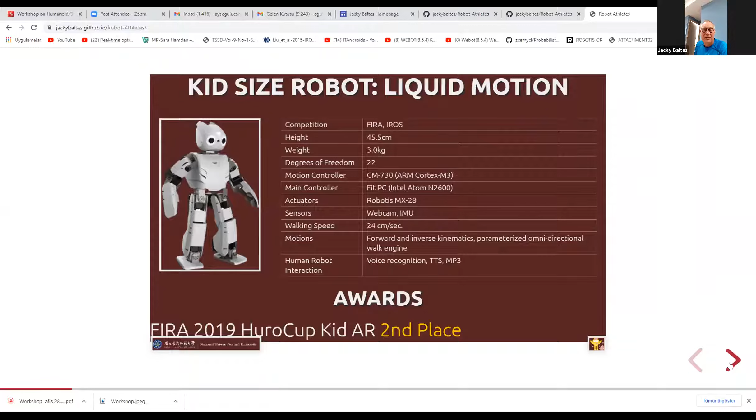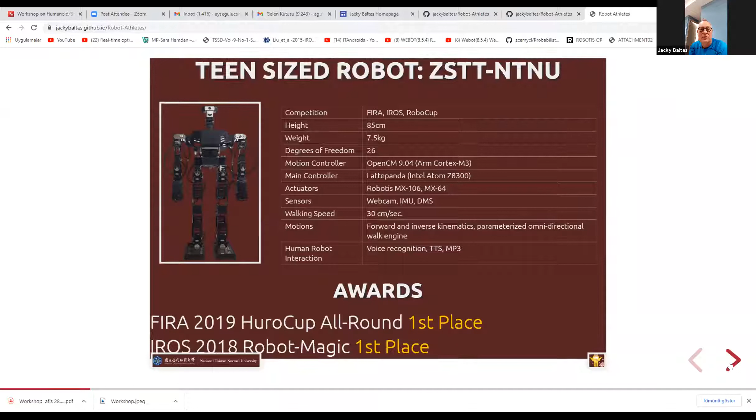Our larger humanoid robot, the 85 centimeter tall Robinion, is heavier and has more degrees of freedom, 26 degrees of freedom. It has articulated grippers, so we have fingers that we can use. With that, it participated in the HuroCup competition and also in the Magic Show.

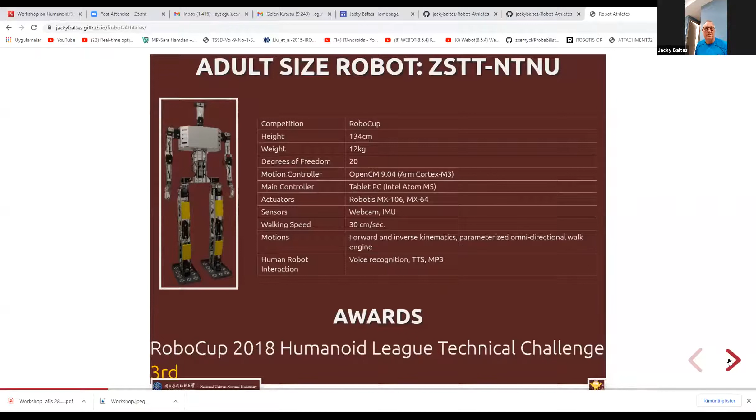We have a 1.3 meter tall humanoid robot that we built specifically for RoboCup, the adult size category. We did pretty well there, winning 3rd place as well.

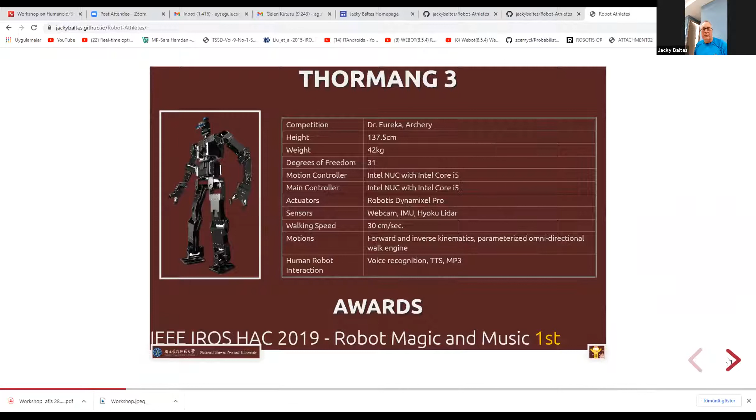Our largest and heaviest robot is the Thormang, which is also built by a Korean company, Robotis. It's 42 kilograms and has 31 degrees of freedom, with more powerful processing and more powerful sensing, in particular including laser scanners. That robot also was successful at the Robot Magic competition.

So for me, robustness and versatility are important aspects of intelligence, maybe the fundamental aspects of intelligence. But humans are actually pretty bad at solving problems optimally. If you consider playing chess, which was one of the standard problems for AI, it took until 1997 until we developed a computer program to beat the human world champion in chess.

In that specific domain, that was possible. What to me was even more interesting was that any one of my students in 1990 could have written a chess playing program that can beat 80% of the people in the world playing chess. Not because my students are supremely smart, but just because most people are very bad at playing chess. It's not one of the things that our human intelligence allows us to do very efficiently.

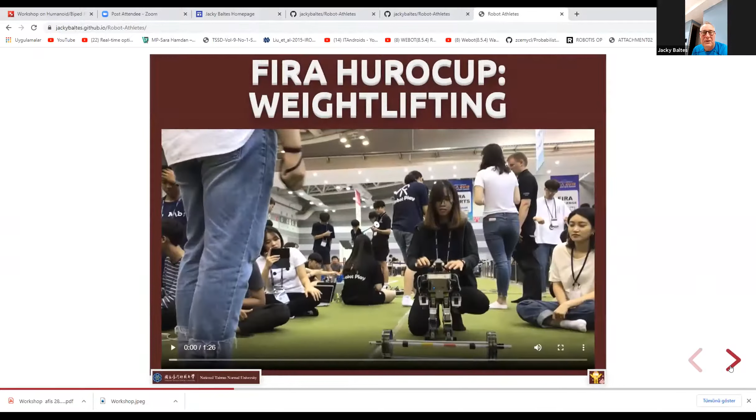Can you go to the next slide then, please? Okay, yeah, we did that one. And next slide, please. Here? Okay, now if you click on the video, at least we can see the video.

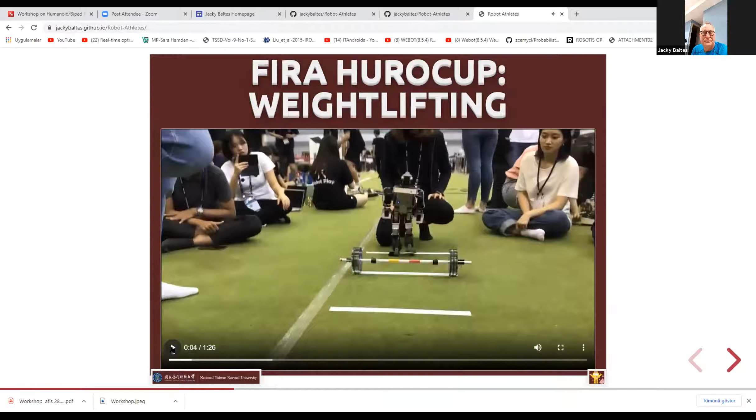So the weight... can I continue? No, continue with the video, but mute the sound. You turn the sound off. Yes, we turned it. Yeah, okay, good. Then we can see the robot.

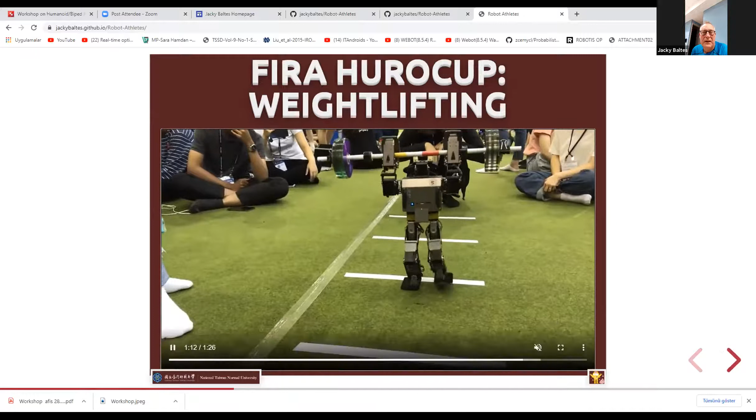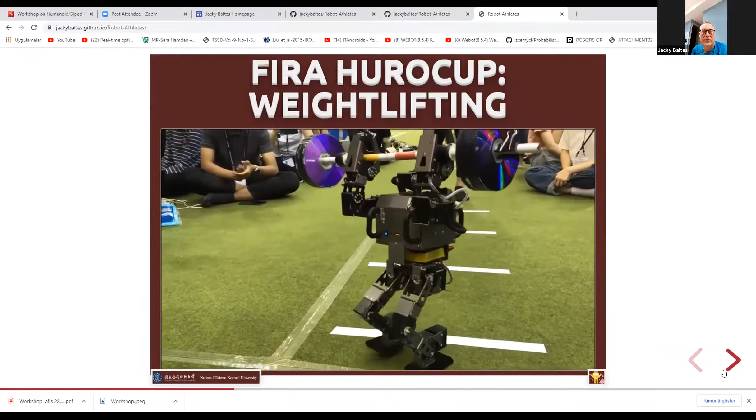So for the weightlifting, it's basically a balancing problem. The robot has to walk up to the weightlifting bar, then move ahead 50 centimeters with the weight low. Now the center of mass of the robot is very low. Now it needs to lift up the weight above its head, which requires proper synchronization between the arms, the legs and the torso. Then it has to walk another 50 centimeters. Now the center of mass is much higher, so it's more difficult for the robot to do that and still maintain the navigation ability, like it still needs to be able to walk at least sort of straight.

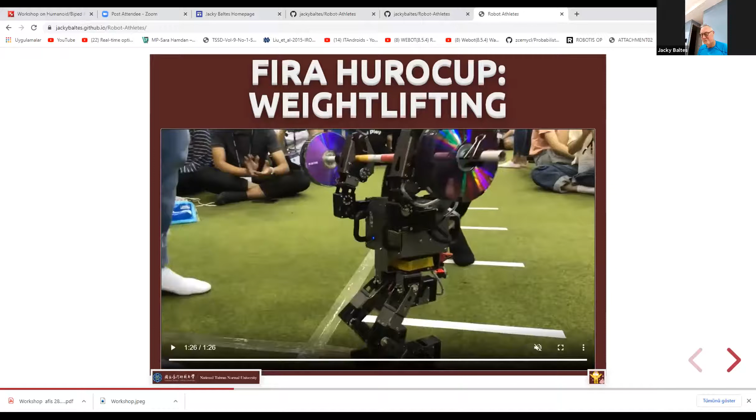So this is one of the events that we have in HuroCup. We can go to the next slide. Next slide, yes, please.

So then we also have a sprint competition. If we go to the next slide, and if you start the video and then mute the sound. There is no video. Next slide. Next slide. Yeah, no, and then start the video and mute the sound.

So in the sprint, the robots have to walk 3 meters forward and 3 meters backwards. So this is a pure burst of speed kind of event. One of the nice things about using sports for AI research benchmark problems is that we can easily see the progress.

So in 2012, the world record in this event was 1 minute and 12 seconds. And in 2018, a team from Indonesia did it in 23 seconds. So you can see how much the robots improve every year, even though we make the challenges more difficult.

And now you can turn on the sound from the video, please, because it's actually quite exciting now.

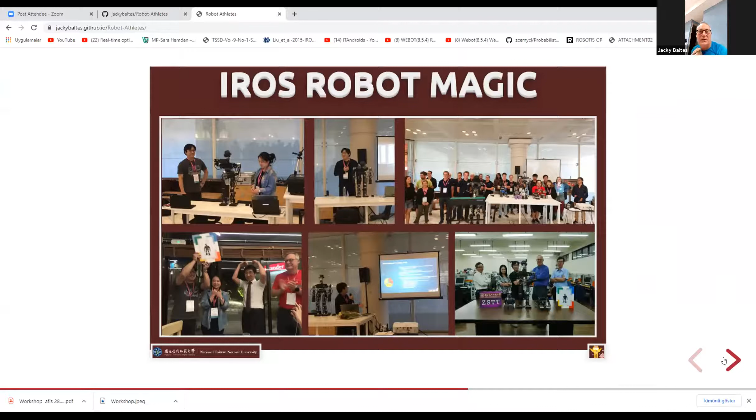And if you play the video, please. I think play the sound, because the robot will give the instructions. I'll turn the volume up.

I think I know where it is.

Cross your arms in front of you now. So the robot is trying to guess in which arm the human put the coin.

And that has a lot of psychology included there as well. It turns out that most people, if you ask them to cross their arms, they will put the coin in the bottom.

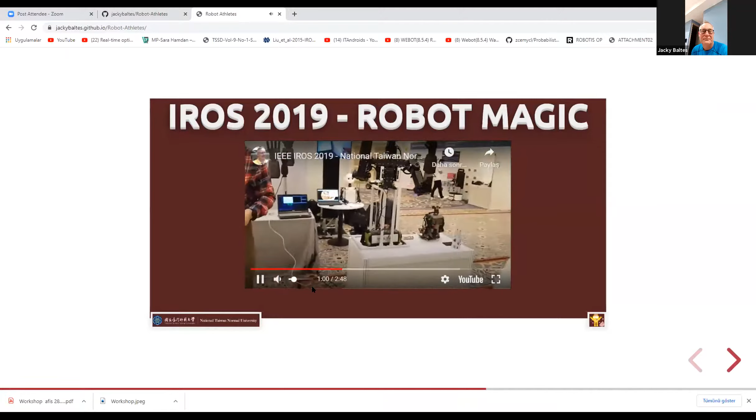And this one, the robot actually guessed correctly. Later, we work out how to detect which arm is on top. It's easy to detect the arms, but it's hard to detect which arm is on top of which other arm.

If we go to the next slide, please. So this is a common magic trick behind hide the coin behind the back, and then I guess when you bring out your arms where the coin is.

And the next magic trick is a nail trick. So there we included some comedy, so I hope that you can enjoy the audio.

The student tells the audience that they've not been successful in their research, so they always place the bag with the nail in the middle of the 3 bags. And they say that in front of me because I do not speak Chinese.

So the funny thing is that they can talk all this to the audience without me actually realizing what's going on. So the audience thinks that my students are using very sophisticated AI technology in order to detect the bag. But in reality, the students are fooling me every time.

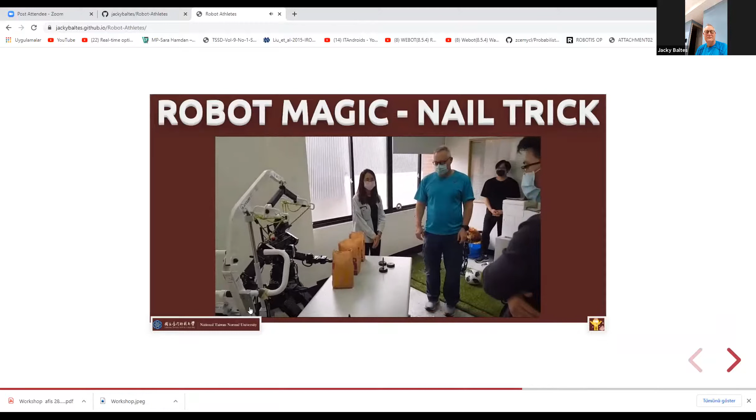Welcome everyone, I am Thorming. Today I am going to show you a magic trick that I have learned recently. As you can see, there are 3 paper bags in front of me.

Later, I will put this wooden base with a sharp nail into one of the paper bags, and then swap around the position of the bags. To make sure we won't find out the bag is empty by feeling the weight.

So I prepared 2 wooden bases without nails. Student, please help me put these 2 wooden bases into 2 paper bags and close it.

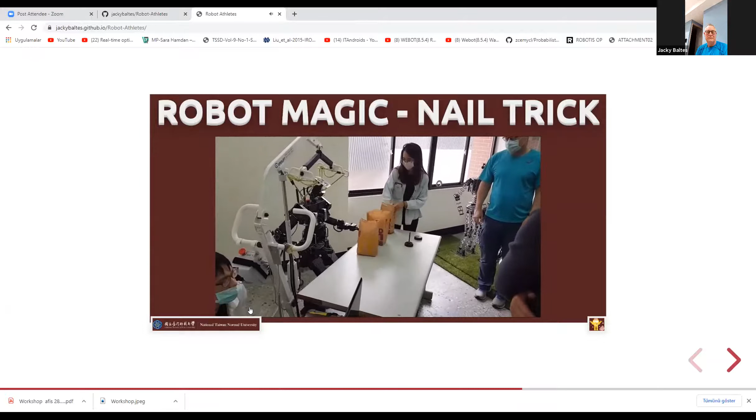So our research goal here is detection, manipulation of soft, deformable objects, because the paper bag is not solid, so you cannot just squeeze it.

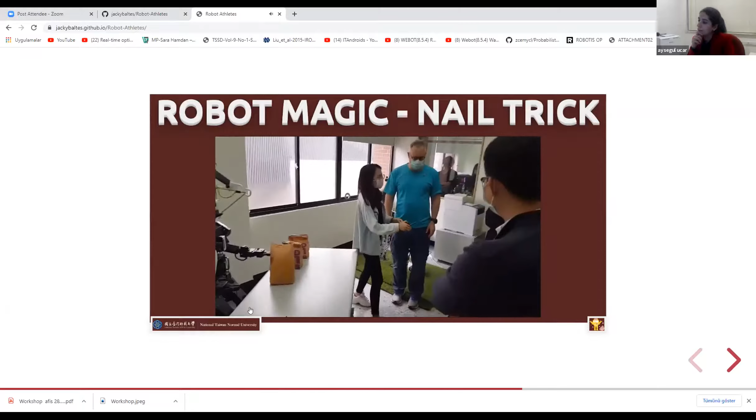Student, please ask an audience member to examine the nail and make sure it is real. Now you can check.

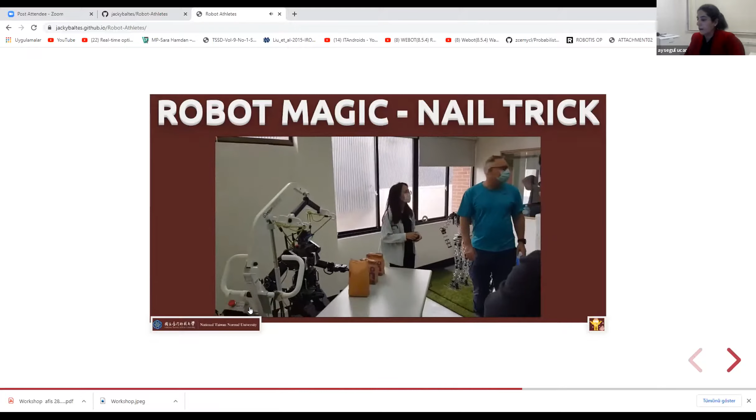So, audience volunteer, can you confirm to the rest of the audience that the nail is indeed real? Okay, thank you.

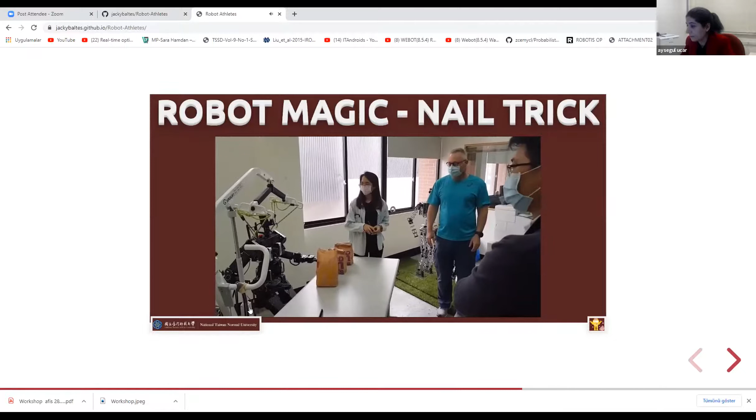Student, please place the nail inside the last bag and close it. And everyone, please pay attention and remember which bag contains the nail.

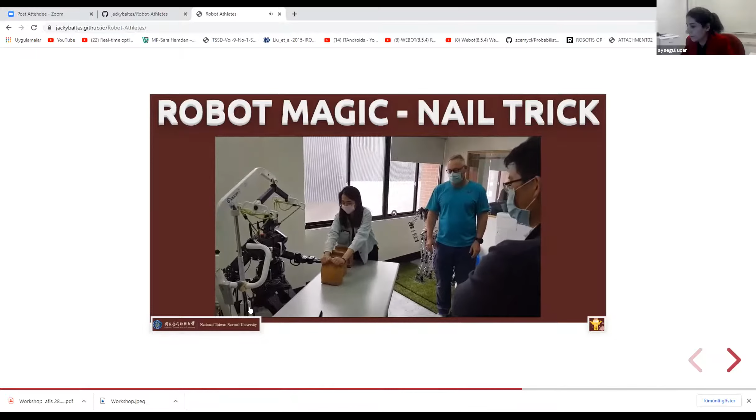Now, I need another volunteer. Any volunteer? Thank you for volunteering. Now, do you remember which bag contains the nail?

So now we're going to shuffle them, but the robot, because it has very fine vision, it can detect where the nail is, basically.

You mean this one, right?

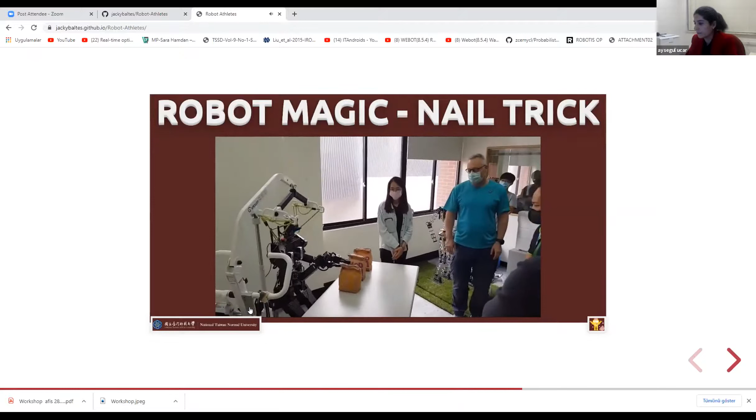To make sure that I won't be able to know which bag contains the nail, the student will start swapping the bags around. When I say start, the student will begin, and volunteer, you can shout out stop anytime you want. So you just need to say stop. Let's start.

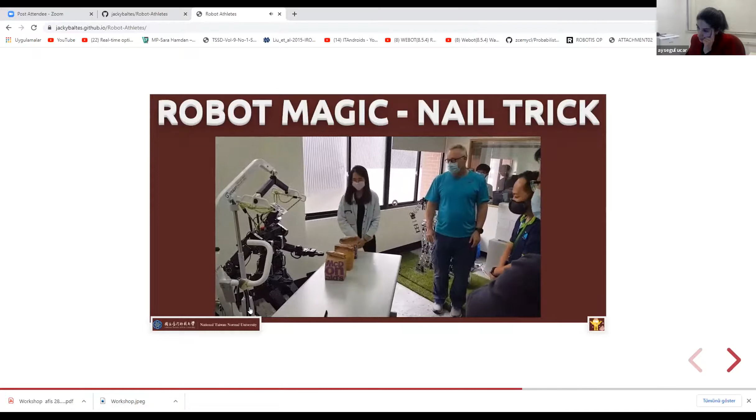Stop. Okay, now I need some time to feel where the nail is.

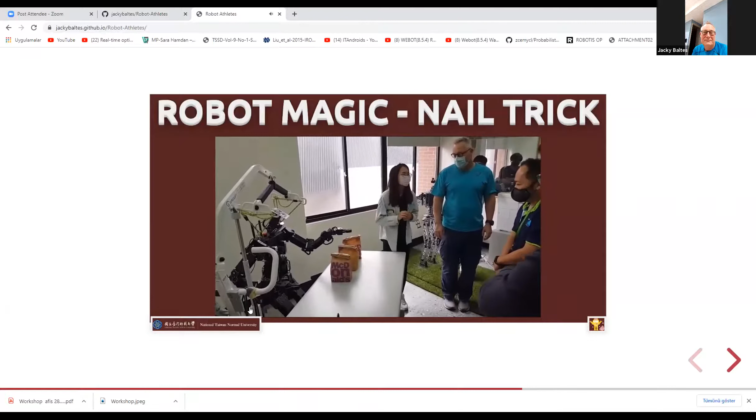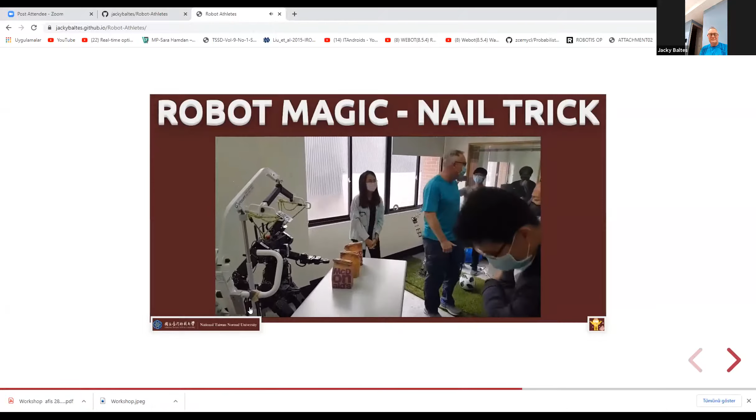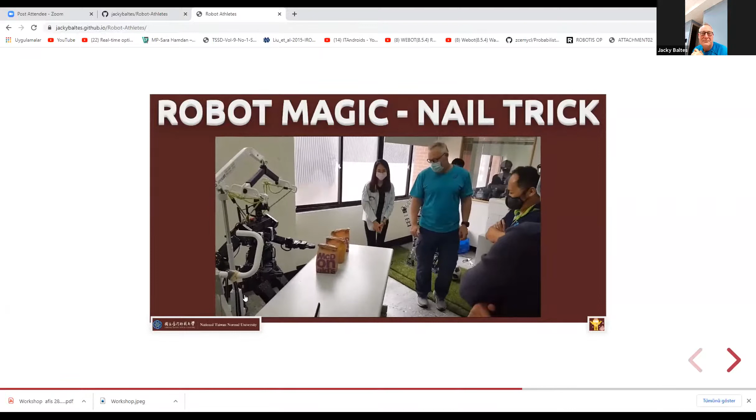Supervisor of your lab, do you believe in my talent and your students' ability? Not so much my students' ability, but their hope to graduate, I think. Oh, I am happy to hear that.

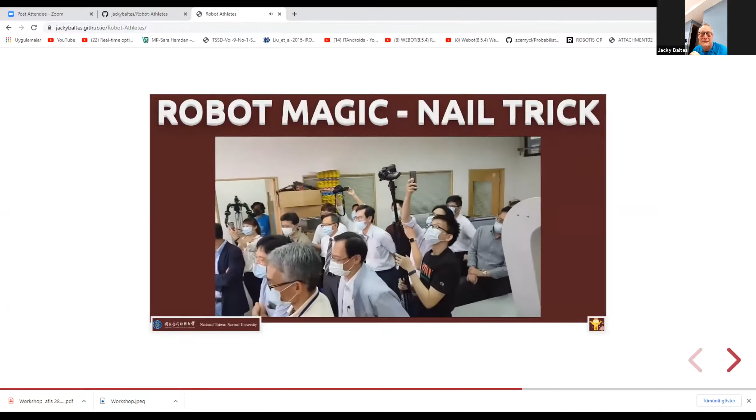Since you trust us so much, we can raise the stakes. How about we use your hand to press down on the paper bags? I'm not so sure about that. It was supposed to be Green's hand, not my hand.

Please give me your hand, Jacky. Okay.

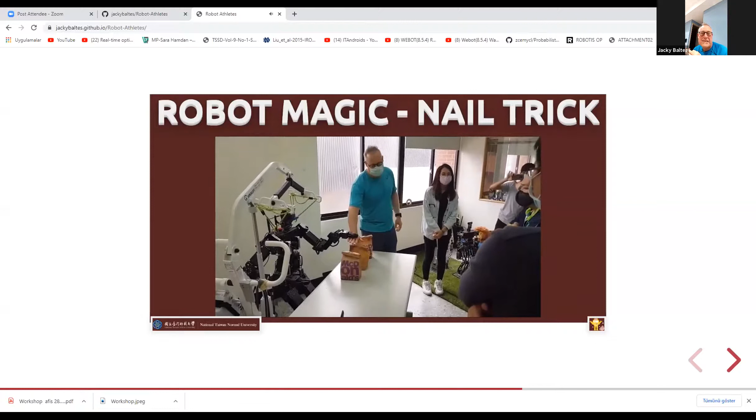Volunteer, choose a bag you think there's no nail inside. Left, right, or middle? Choose wisely. We wouldn't want our dear professor to get hurt, right? Left. Okay, left.

Okay. You sure about this? Oh!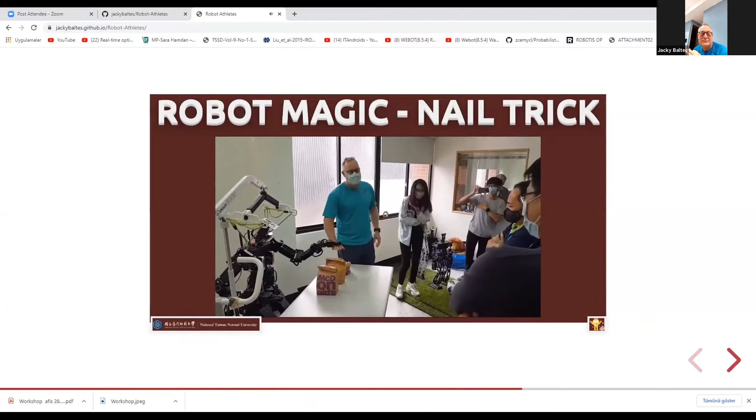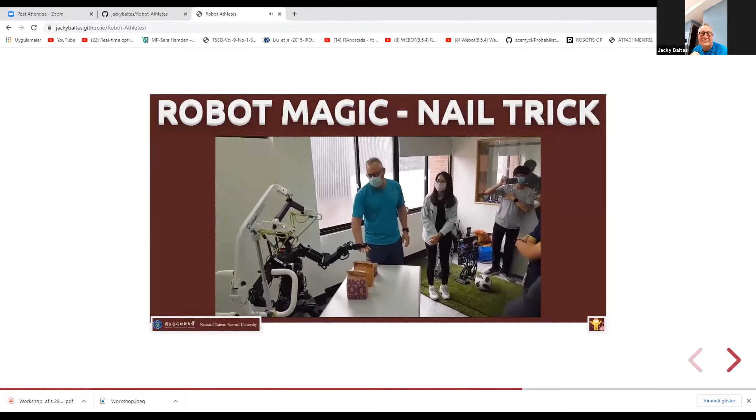Okay, Jacky, don't be nervous, don't you trust me? I am the only hope of graduation for your students. True, they won't disappoint you, trust me. Okay.

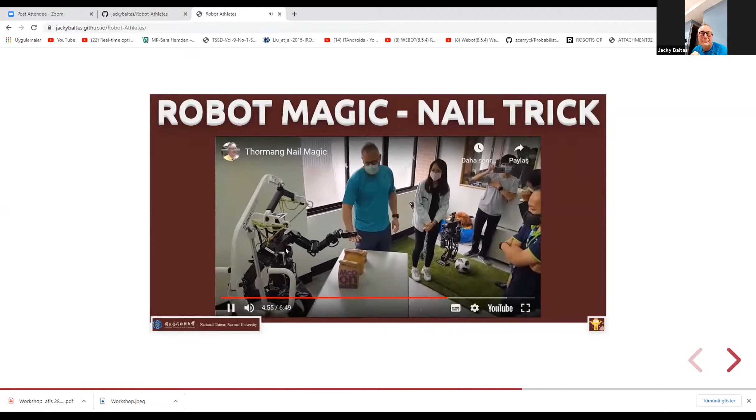Hey volunteer, what's your next choice? Left or right? Right. Okay, right. Okay.

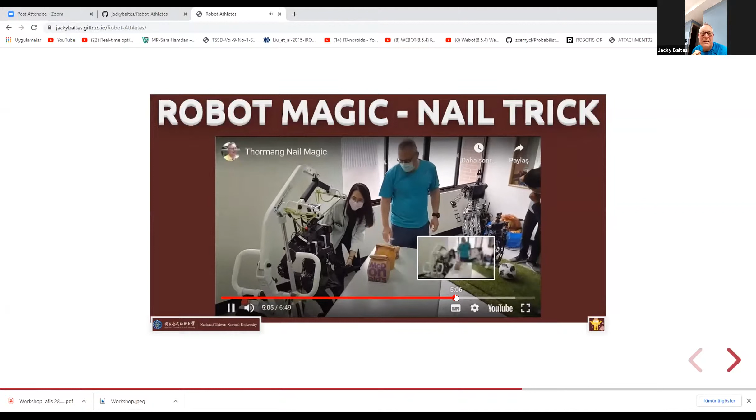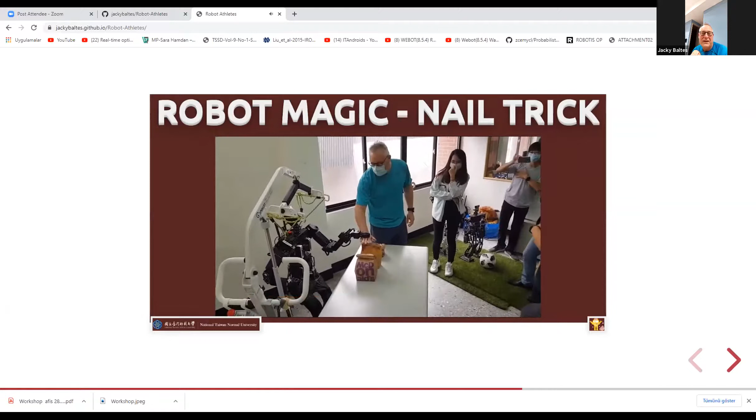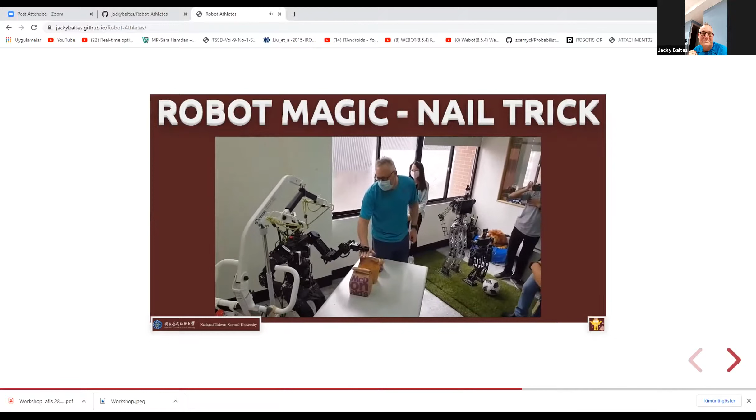Jacky, do you trust me? No, not really, no, you just remove it. Why? I only made one mistake. Yeah, but you see, why don't you give me another chance? I only have two hands.

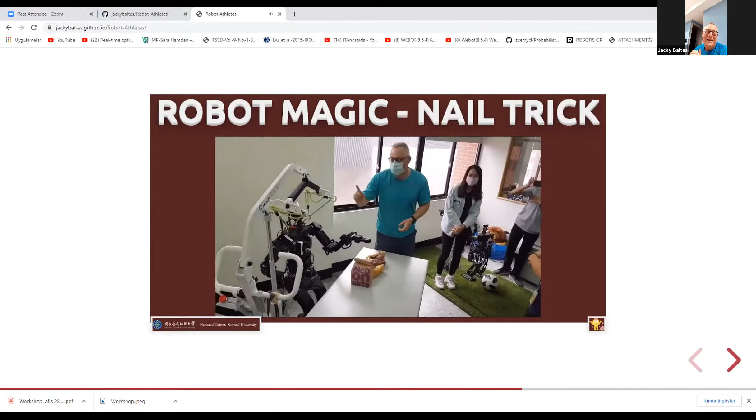Well, here. We forgot to put the snap on. That's the problem, like you. Ha ha ha, don't get that scared, I know what I am doing.

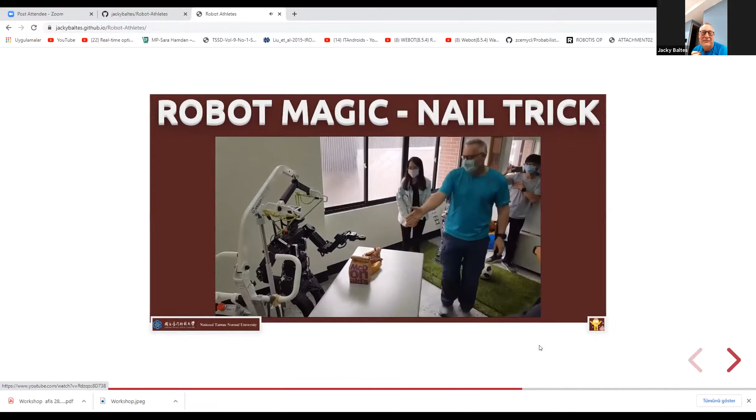So you might be really curious where the actual nail is, right?

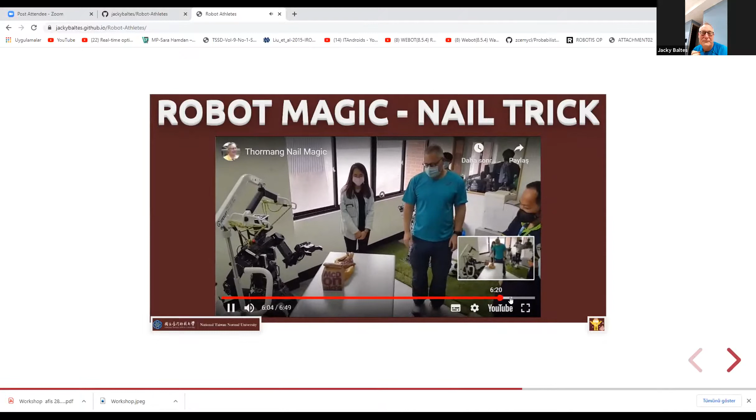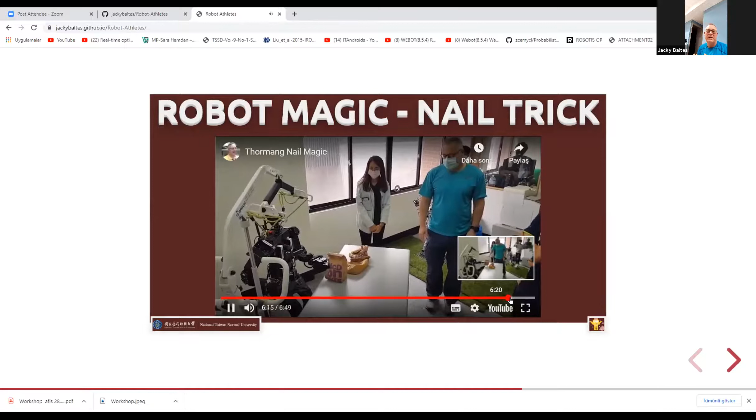Other bag. Jacky, please help me check what is in the bag.

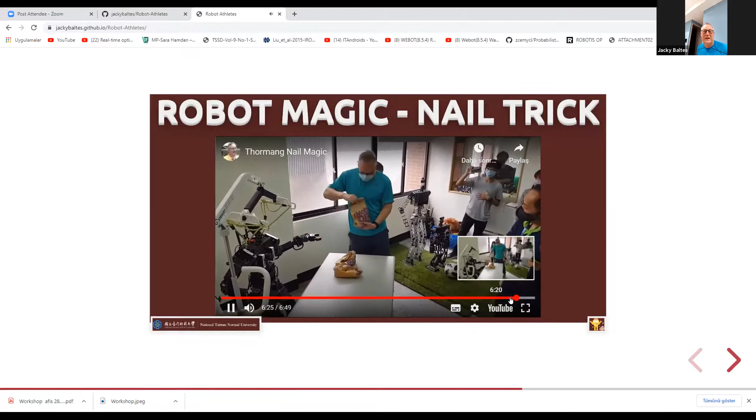This is one of our favorite magic tricks that we like to do with the robot. It works particularly well in the country. So you can...

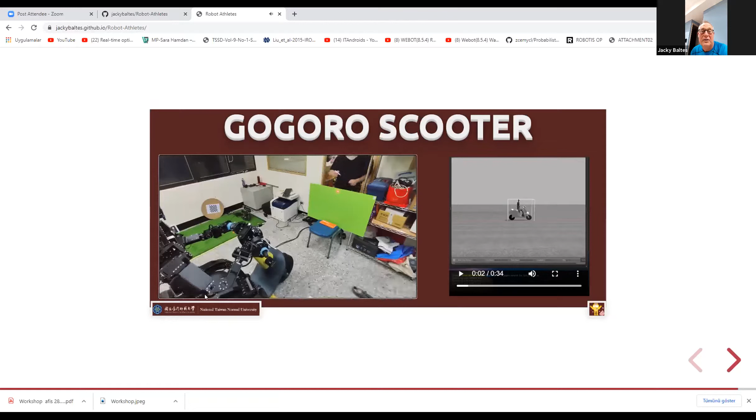On the left-hand side, you see my students working on accuracy and precision of our control for the steering angle. So we mounted a laser pointer on top of the scooter in order to be able to tell the robot that we need to turn 12 degrees. We need to know that this is exactly 12 degrees, and we need to know how accurate, how precise it can do that. And on the right-hand video, you have a simulation of our robot on the Gogoro scooter.

If we started from the beginning, you can see the robot drive off, and then there's a push, and then we use, at the moment, a very simple inverted pendulum model in order for the robot to steer so that he stays balanced on the scooter, which is, of course, one of the challenges that we have with this particular project.

So just last week, we added the training wheels. Our real driving tests are going to start sometime in the middle of December, and we're all very excited about this. This is by far the most ambitious and interesting project that we're currently working on.

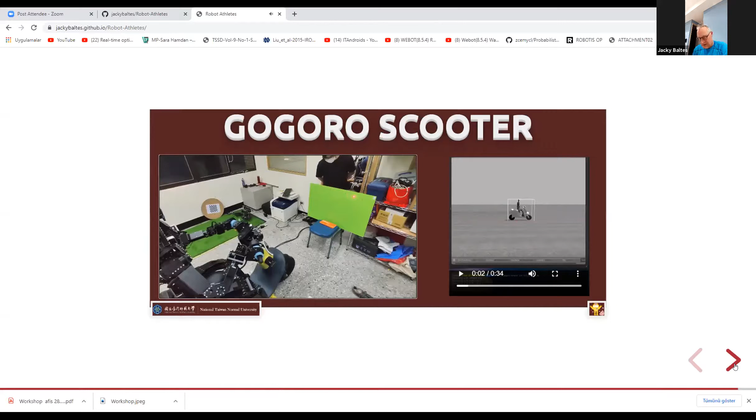So the technology that we use to achieve these different tasks: we use HOG feature detectors, we implemented a visual compass algorithm, developed one for the sprint event, various motion planning for soft objects for the magic show to pick up the bags and the nails and everything.

We have a simplified version for edge devices of YOLO 4, and a NN inverse kinematics motion planning system for the Dr. Eureka game. We use deep Q learning to learn how to manipulate a keyboard and type on an arbitrary keyboard. And we've then extended this into automatic defibrillator devices.

And also for the Gogoro scooter, we want to apply reinforcement learning so that the robot can learn how to balance on the scooter independent of the exact center of mass of the scooter, for example, or the exact control function of the throttle.